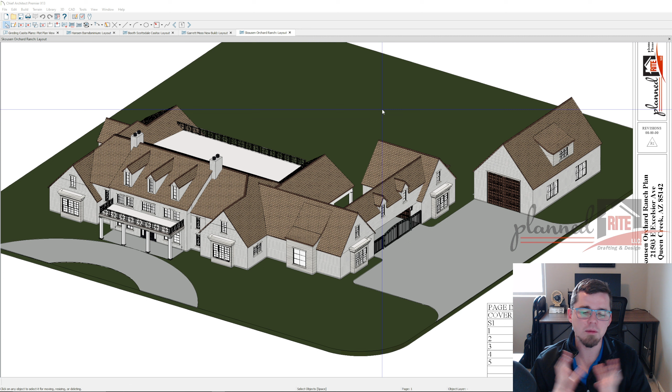I'm not one to try to sell you on a low price, that is not our focus. Our focus is quality, making sure that you are getting a good plan and exactly what you're looking to design. It's great that we happen to be much cheaper than an architect, but it's not our focus. We just want to make sure you get the best plan possible. So that's why a draftsman versus an architect. Most of the time if someone's asking for an architect, we'll do exactly what they're looking for.

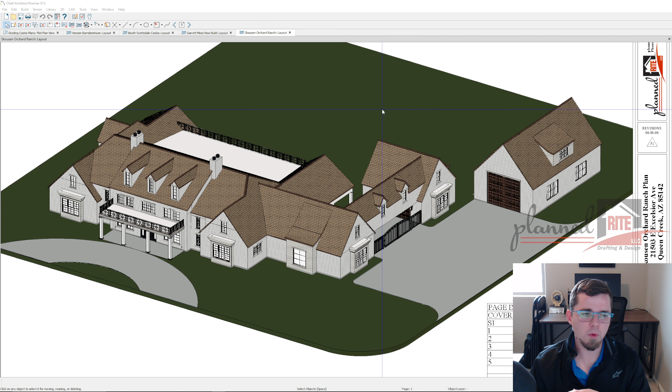When our clients initially reach out to us, generally they say, hey, let's focus on a new build for now. I've got a lot in Queen Creek we want to build on, about a quarter acre. We've got some ideas on what we want, can we send you some stuff? Generally they'll send me a few links for plan sets online. I did a video in the past about why you don't want to purchase those cheap $1,000 plan sets online, for many reasons, usually you just lost $1,000 or $2,000. But they'll bring me a couple of ideas and say we want to mix these together and make our own home. That's perfect. I will find out the location of the property.

I'll find those designs, and between those I'll do a little bit of research on the back end to make sure it's something we can help you with. Then we'll send you an estimate.

Once you're happy, you'll go ahead and send that down payment. Once we have a down payment and a signed agreement, you're in our queue. When your turn rolls around a few weeks later, we'll get working.

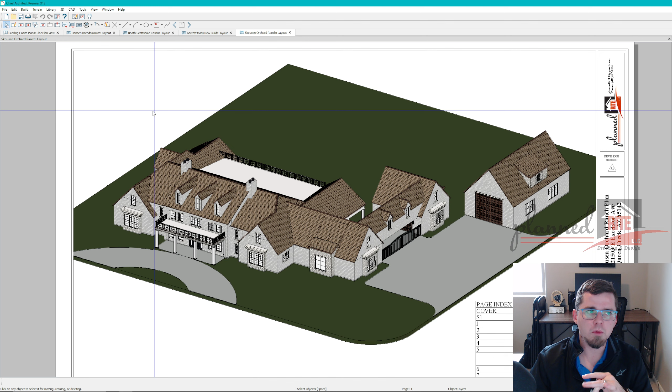As we start working on the project, especially for a remodel, an addition, or an additional building, I'll ask for pictures of the property and measurements if I'm not going. I don't do site visits for every project—more often than not I do, but for a pretty basic addition there's usually not much reason for me to go. I do charge for site visits, so you can usually save time and money by grabbing the pictures and measurements I need.

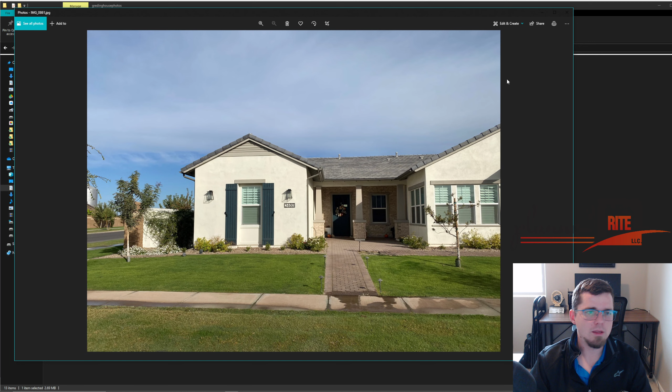As an example, here are some quick pictures a client sent. We're doing a casita for a client here, and I just asked for some pictures of his home. It's a newer home, so there aren't many pictures online—I'll usually check Google Images or Zillow to get a feel for the place, but he sent me pictures all around his new home.

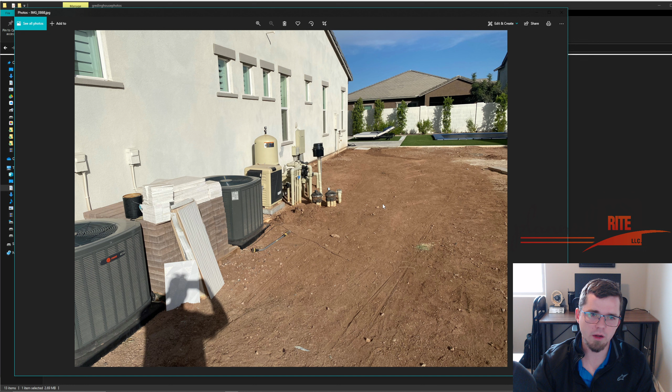We're putting a casita right here—kind of looking at my camera, right up in here—on the right side, a small one. He had a pool put in, and all the pool lines run over ten feet from his house, which frustrated him a bit. So it's a little further than you'd like, and we have to be careful not to get too close with the casita's footings.

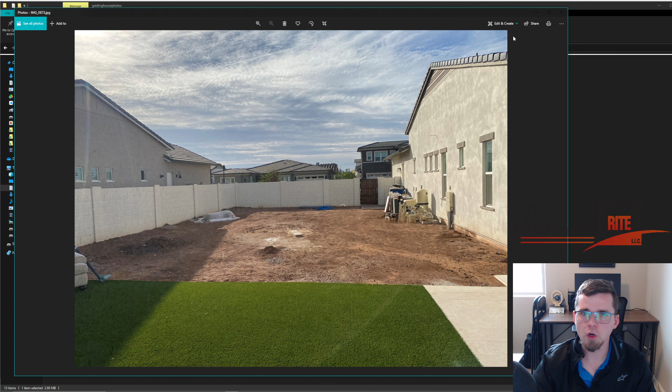He sent me these pictures, and the rest as well, so I can get a feel for the design of the home and try to copy it as closely as possible. HOAs always want it to look similar, and honestly most jurisdictions will too—and you will as well. You don't want it to look too different from your home; make it look natural.

I'll also get pictures—side note, I've got a kiddo crying in the background, won't go to sleep, don't mind him.

I'll ask for pictures of the breaker box, your electrical panel, so I can build out an electrical schedule. That's part of the plan set, which I'll show you in a sec.

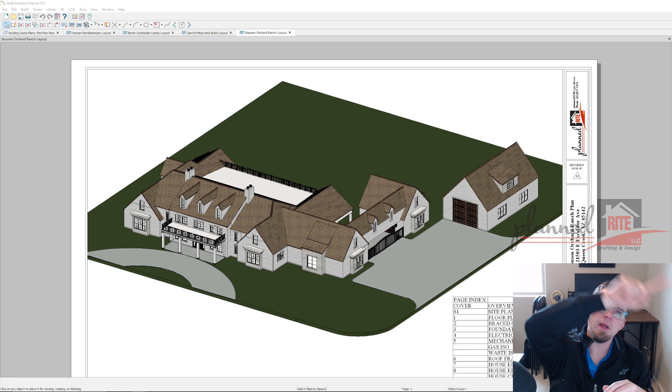I'll also need some measurements—usually rough measurements near the remodel area. Say you're adding onto the kitchen and living room at the back of the house, bumping out a 20 by 20 space for a master suite. I'll ask for pictures of windows and doors in that area, their sizes, and how far along the wall they are, so I can get those dimensions. Let me know what's on the inside too—if there are counters or a bathroom in that spot, just mark where those are. That's usually sufficient to build the rest out.

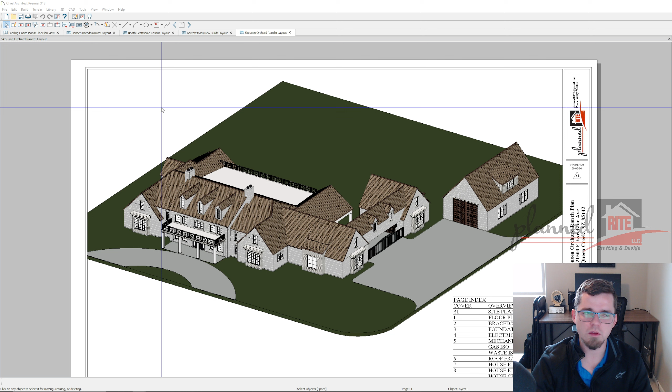If I need more specifics, or it becomes too much of a headache for you, I'll do a site visit and pull all the measurements I need. It usually takes a few hours, and I'll model the existing home on site so I can get all the answers I need before I leave.

As I begin the project, especially for an addition, one of the first things I do is draw out the site plan, or at least a sketch of it. It's not complete here, but it gives me an idea of what I'm working with—showing your property's dimensions, setbacks, and any easements, like the public utilities easement (PUE) you can see here, and a vehicular non-access easement, which just ensures you have a side yard instead of two front yards.

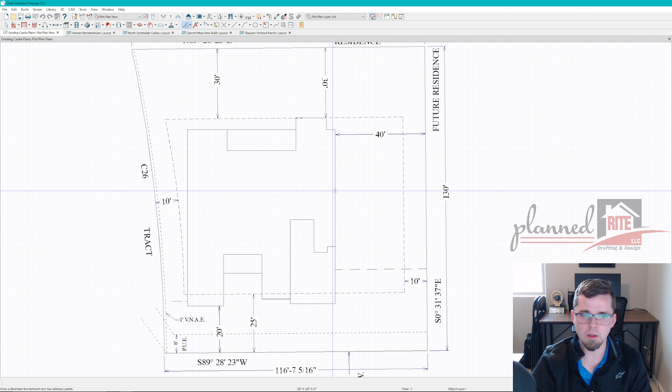Don't worry about that right now, but this is here so that as I get building—this is actually a site plan for the casita pictures I just showed. Now I know exactly where we can place it. I've got measurements: about 30.5 feet on the side of the house, and if the pool lines come out those 10 feet or so we talked about, I've got an extra 20-ish feet to build the casita in.

So that's one of the first things I'll do—build this out. What I've run into in the past is we get excited with the design of the building, I wasn't looking at the site plan, and we realize, oh shoot, we're out of the setbacks and have to change up the design. That cost me a lot of time because I didn't look into that first.

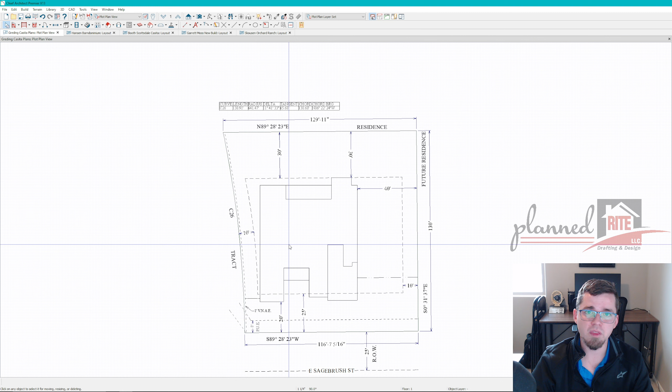Now, as I get working with you, you'll get pretty consistent updates from me, including something like this. I wouldn't send just this since you already know your lot, but I'd give a rough outline of the location of the casita and say, hey, this is where we're looking to put it, here are the measurements—does that look good? If you give me the thumbs up, perfect, we'll start building it out.

So these are a couple different active plans. One of them is complete, the rest are active—I'll show you.

We're very busy right now, we do have a pretty big backlog of projects. So if you're looking to get projects done, always happy to help, of course, but everyone in the industry is busy.

So we have this one—all we have is the first preliminary design. We didn't go too deep into what they were wanting; they gave me a sketch of what they're envisioning. This is a barndominium, a steel building they purchased, and we're building half of it out as a home and the rest as a big garage for him. He's a truck driver, big truck guy, so he needs a place to pull his truck through and perform maintenance, whatever else needs to happen.

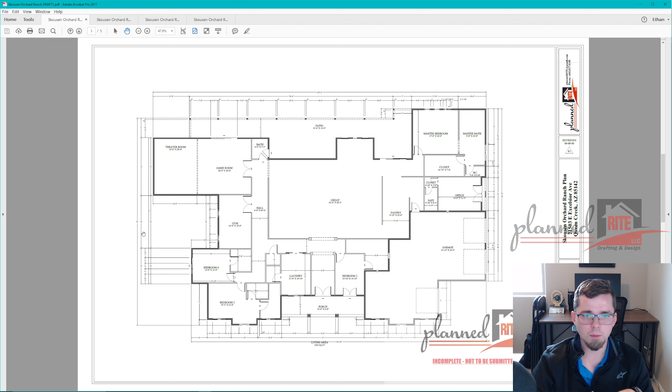So I sent this first draft to them and they're going over it. This is another project I've been actively working on—you'll get a first draft as a watermarked PDF with rough dimensions of the full floor plan, maybe a rough layout of the roof, some elevation shots. This is really just the first inception phase, where we get the design figured out before we dive into the drafting part.

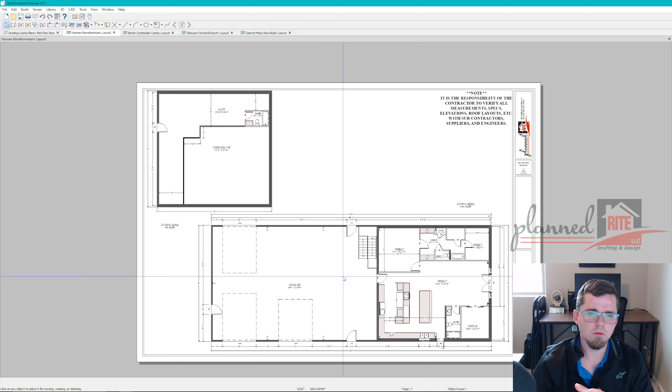So I have my design and drafting phase. Once they get back to me with a couple of tweaks they want to make, we'll go back and forth a little to fine tune these—you'll get multiple drafts from me. Usually you're getting at least an update a day as I'm actively working on your project. Most of my clients take a week or two to get back to me for a lot of the design phases, so it can take a little longer, but we're usually pretty quick—I usually get drafts to you the same day after I get responses.

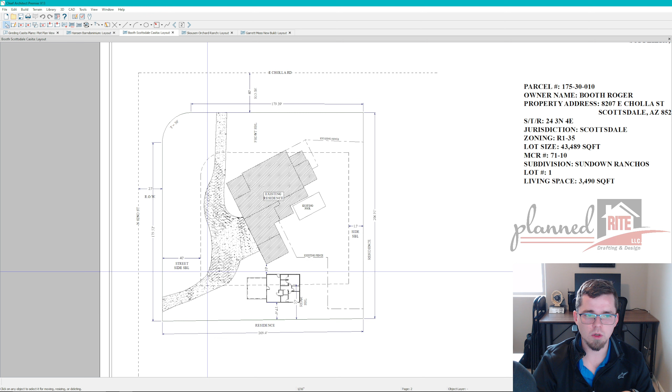Once they're happy with that design, I'll start filling out a little bit more. Here's another project we're further along in—we're fine-tuning the location of this casita on their property, playing with where we're going to put it. Looks like we may get it about as far over here as we can. They've got a nice golf course just north of here, so it'd be nice to have a view of that. I've spent some time working with the town, Scottsdale in this case, making sure we can build in this area.

So the draft they got from me looks essentially like this. This is within my program, but I export it as a PDF, exactly what you're seeing—they'll get an overview snapshot of what it looks like, plus a link to view the model in 3D, like I've shown a lot on this page.

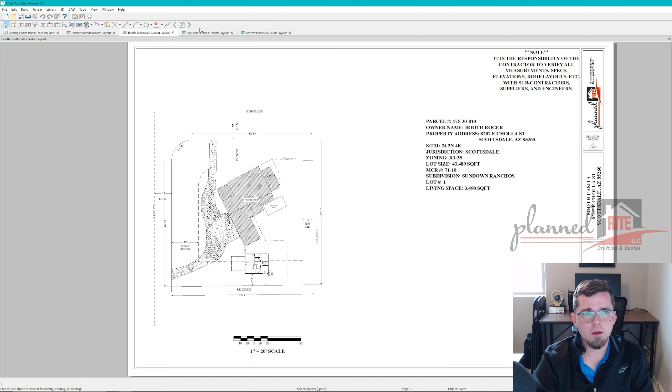A little bit more detailed dimensions now and locations, now that they're happy with the layout. I haven't started on the foundation yet. The electrical, I had to back up a little bit, but generally I'll start filling in some of the electrical here so you can get a feel for where things are going. Let me know if it looks good or not.

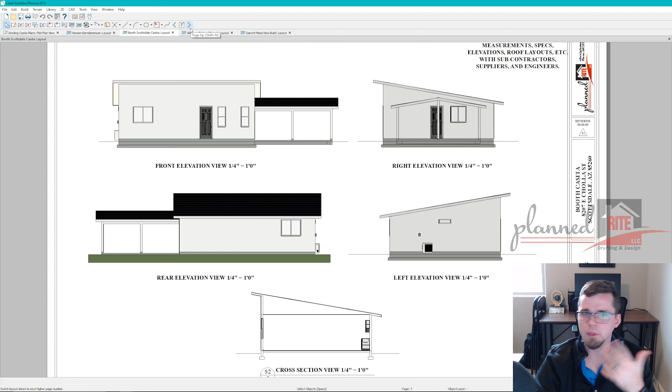So this is kind of the next phase after here of the design. Still very basic. I take it piece by piece. I don't want to build the whole thing out, send it to you, and see if it's good, because if you want to backtrack it, it wastes a lot of our time and yours. So that's kind of the next phase, and then we're happy with the design, we like the layout, awesome, go get to drafting.

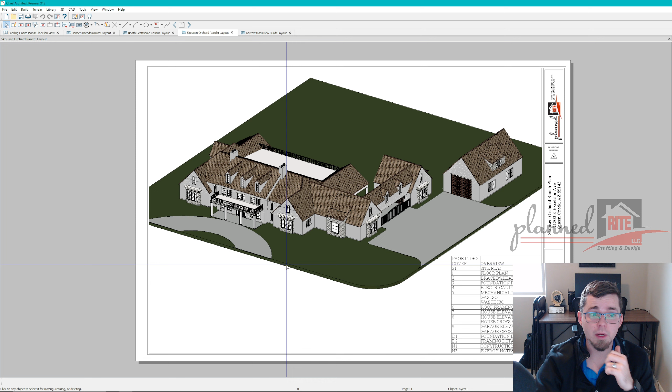So this is a project I've been working on for some time now. Got it early last year, and a very good friend, great client. I've done a few projects with them. He's a contractor, one of the contractors I recommend to my clients. He's built some incredibly beautiful homes, and I've shown this home a few times.

This has gone through a lot of revisions. I know on this project alone, we have a couple hundred hours on it. I've definitely worked more on this project than anything else. I'm glad, or I guess they're probably happy they're friends. I've loved working on this, but goodness, the amount of time into it's pretty, it's something else.

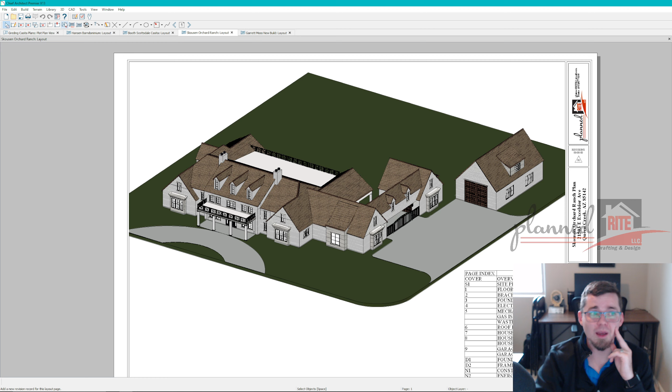And I do track all the time I work on my projects as well. So if you end up wanting to do revisions after you've already given a thumbs up on a design, I do generally charge for that. If I'm backtracking, of course I'll charge extra for that. Now, that being said, don't feel that I'm going to be nickel and diming for revisions. I've only charged additional for revisions a few times. I'm very reasonable when it comes to that.

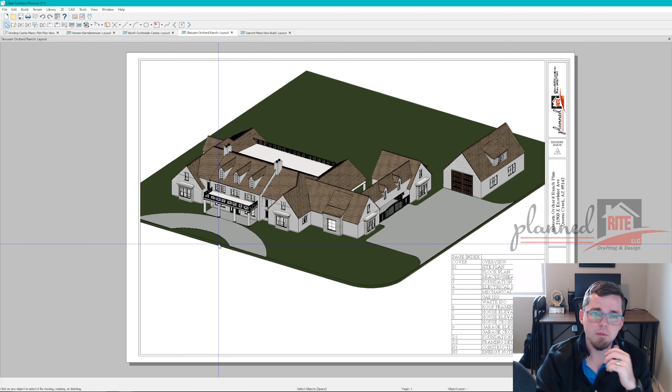I also want the home dialed in, and I expect to go back a couple of times. It's more if we get working, you give me the thumbs up, I'm working on the drafting side, and then you make changes, that does end up, we lose a couple hours of work or so on the project. So anyways, that's all in my contract.

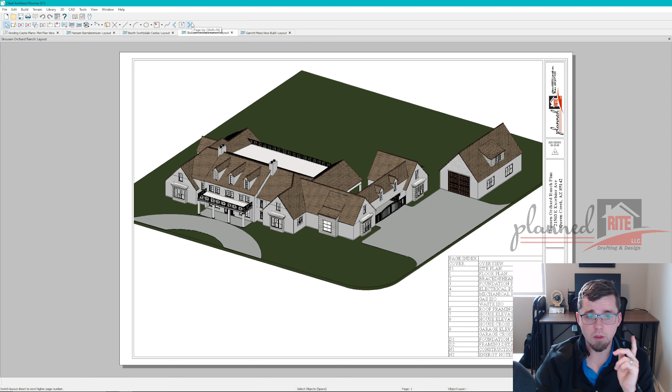All right, so now we have a design, thumbs up. I've been working pretty diligent on this project over the past week or so. I want to get this one done by the end of the month. That would be awesome. It's huge, and this will be just an awesome home, so I want to see it built.

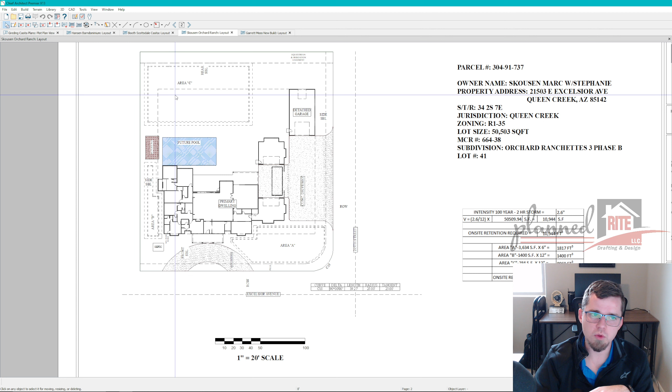We have a much more detailed plot plan now. We don't have dimensions on here right now. As I'm making adjustments, the dimensions tend to sometimes get deleted, so I need to go back and add stuff back in, but we have essentially the layout that they're looking for. Queen Creek requires a basic retention plan, so at least showing where water is going to be draining, and that's all shown here.

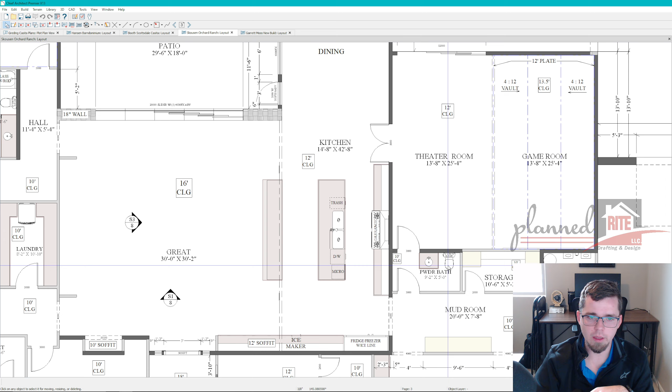We're labeling some stuff in the bathrooms, where the cabinets are going to be, what is in the countertops, the ceiling heights or soffit. We've got a vaulted ceiling in here, sort of a tray or coffered ceiling, flat in the middle. Door and window sizes, locations. So much more detailed here.

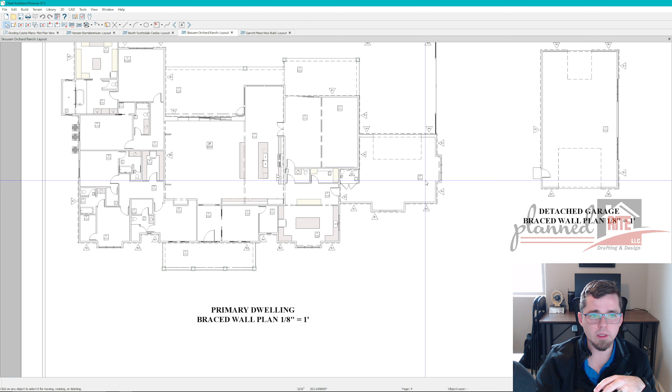And then we get to the braced wall plans. So it's more, again, the drafting side. And again, this is after you give the thumbs up on the design. I'm working on the drafting now.

So I'll usually go dark, or one of us will usually go dark for a good few weeks, depending on the scale of the project, maybe a few days, as we work on the rest of this drafting. Most of the clients, most of you really don't care or know or want to know what's going on the drafting side, because you're focused on the design. You just want permits. So we'll go dark, work on all this. You hear a lot from us in the design phase, of course.

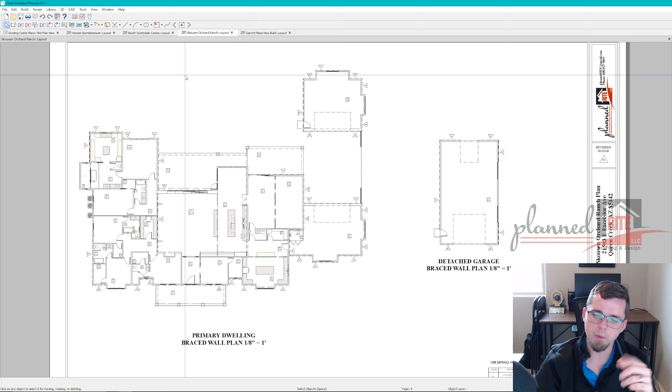Foundation again, working on all these extra details. We still have a couple of days worth of work to do on this one, but we're getting closer.

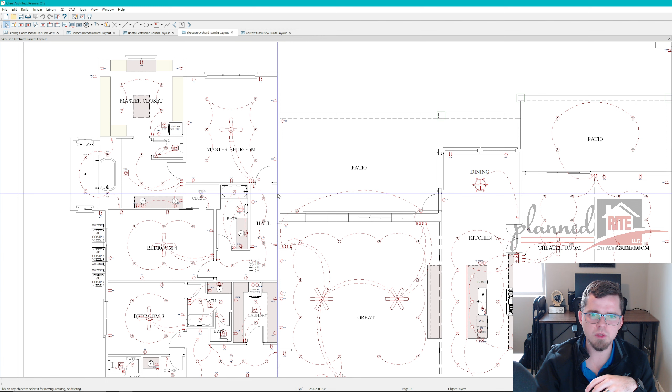On the electrical, so working on getting all of the electrical laid out. This is something that I do involve the client in, something I ask them to check. What I really want them to check is making sure we're not missing anything important.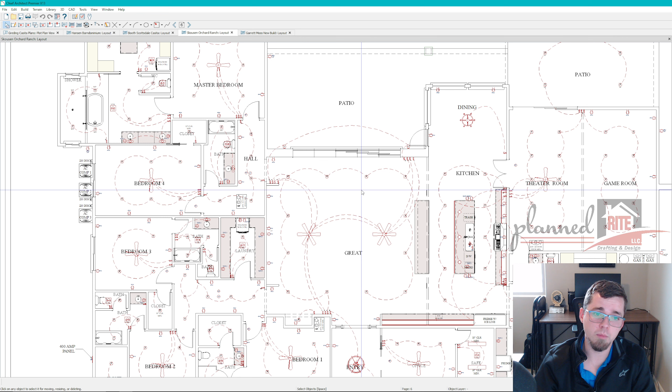If you want lights moved a little bit, I can do it, but it doesn't really matter on the plans. At the end of the day, your builder is going to put them where you want them, and an inspector is not going to slap your hands because you decided to put an extra few lights here in the middle of the great room.

They will slap your hand if you decided to add an extra 240 outlet, or say you add a Tesla charger or something down the road, putting in a much larger charger in the build that wasn't shown on the plans. Depending on the inspector, they may get a little upset. Probably not.

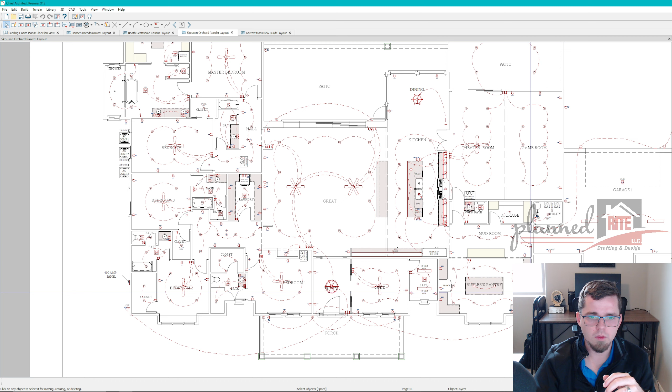The reason being is because of the calculations done beforehand to make sure your house can handle that extra power going to it. Anyways, it's usually a little bit laid back. We just want to make sure everything's per code on the plans and when installed in the field. If you move stuff around, it's fine.

The only thing with the electrical I want to make sure of from the client is that we're not missing any large appliances or whatnot that you want placed.

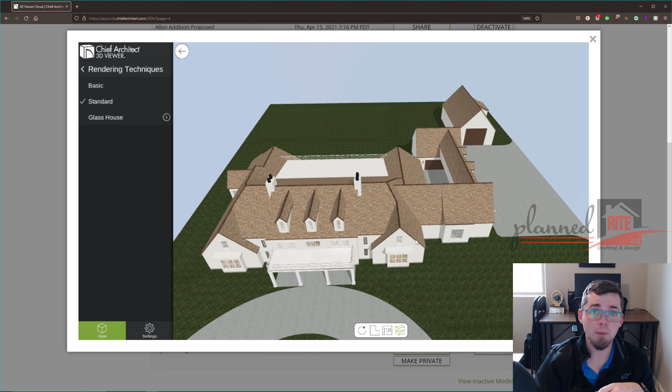Again, we've been very busy, so it's been hard finding time even to do a little recording like this for a half hour. Anyways, there may be a much better option for showing models to clients, much higher resolution, potentially easier to look at. Could be kind of neat.

We'll see. I'm not going to go into how to view this — I've got plenty of videos showing that — but this is the model that the client gets so they can make sure that this is what they are envisioning. Again, it's a lot harder to visualize it here.

Another beautiful home. Finished up a home for this gentleman and actually his father as well, and they're going to be across the street from each other. So that'll be pretty fun to see those going up next to each other, homes that I was able to help design and get drafted up.

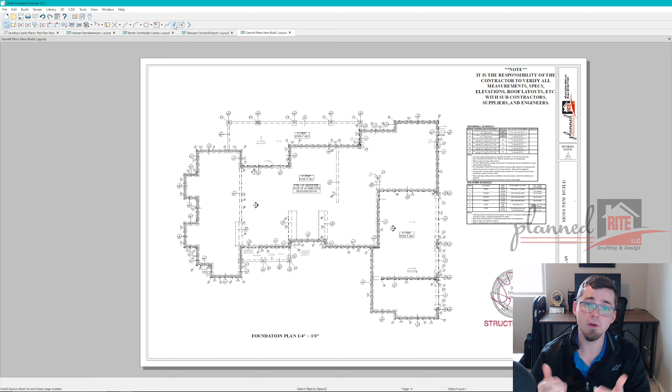We want this to be a good, pleasant, positive experience for you. It's exciting. It's very rare that I have frustrated clients, not because we make excellent plans, though I think we do, but realistically because they are excited. They're building a home, they're building an addition. That's a fun time. Sure, it's expensive and it can be stressful, but it's an exciting thing. So we want to make sure that stays a positive, fun experience for you as a client, a homeowner, a person, a neighbor of ours.

We want it to be fun and interactive, and here at Planned Rite, we offer more than most when it comes to that involvement. We want to make sure that this home is what you're envisioning.